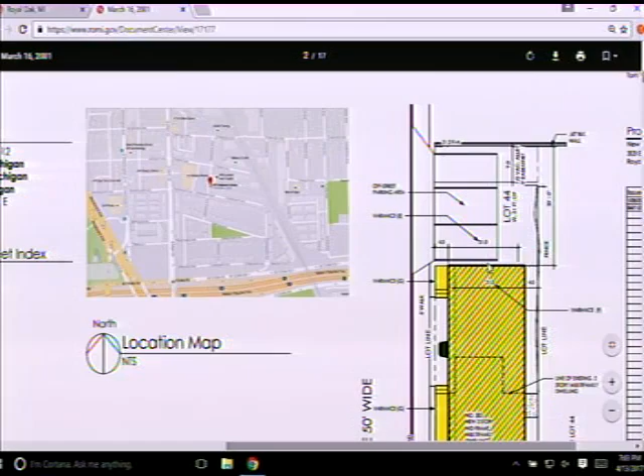illustrates 3 parking spaces to the north of the building. However, the most adjacent parking space shouldn't actually be illustrated there due to the fact that if you refer to the floor plan, there is a lower level apartment unit that has a required egress window well. And that window well projects out to the north into what's depicted as that parking space. So we can't obviously count that since it will be eliminated.

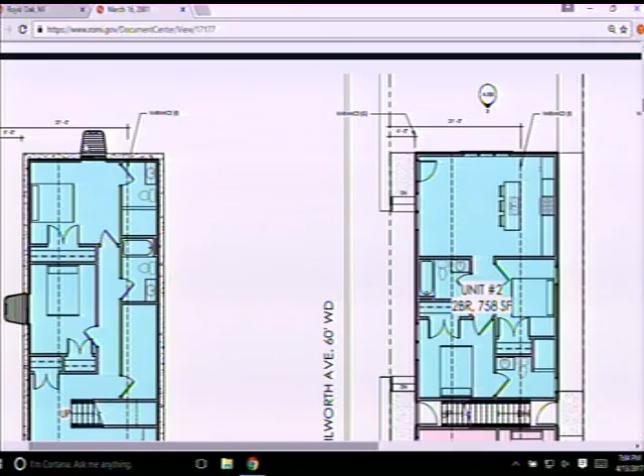So they're left with 2 off-street parking spaces, and again, they're required to have 14. So that's a reduction, but it's still 12 short of the required 14.

The lot size only allows for a certain number of square footage based on the lot size and the number of units. They've reduced the number of units, and therefore it reduces the required minimum lot size, but it certainly still requires a variance. There's no change in the setback variances that are being requested, and it does eliminate the need for variances associated with the size of each of the dwelling units.

So the ordinance does have a minimum size for a studio, a 1-bedroom, and a 2-bedroom. And the footprint of the building stays the same. But by decreasing the number of units, it made those remaining units larger than the minimums. So they're no longer seeking a waiver from the minimum size for each of those type of units, the 1-bedroom and the 2-bedroom. So those variance requests are eliminated.

That's a brief summary. If you have any specific questions, we can delve in a little bit further. Are there any questions for staff at this point? Not seeing any. Are the petitioners present?

It's Tom Violante, 2758 Amberley Lane, Troy, Michigan.

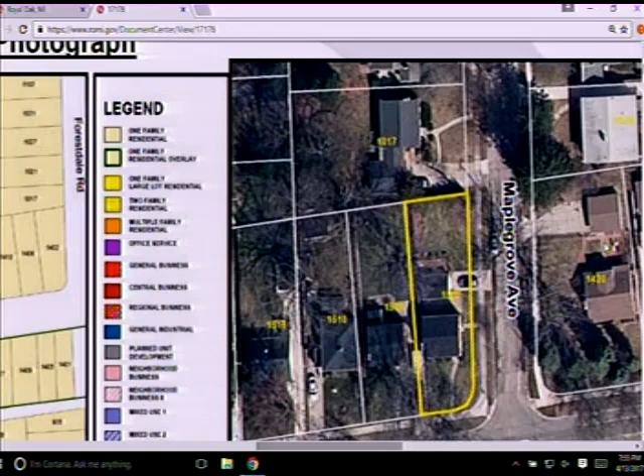This lot is located at the corner of Catalpa and Maple Grove. There's an existing detached garage accessed from Maple Grove, as you can see on the aerial photograph in front of you. The petitioner is proposing to demolish that and construct a new detached garage, which I'll illustrate on the survey sketches.

This side-by-side comparison illustrates the location of the current garage, proposed to be demolished and relocated a little further to the north. The existing garage and the proposed garage are located within the front setback of the house to the north, which fronts along Maple Grove. Zoning ordinance requires that any structure, whether it's the house or the detached garage, be set back equal to or greater than the house to the north. So the proposed garage would have a 24-foot setback from the property line, while the house to the north has a 39-foot front yard setback. They're seeking a waiver from that front setback requirement in order to construct the new garage.

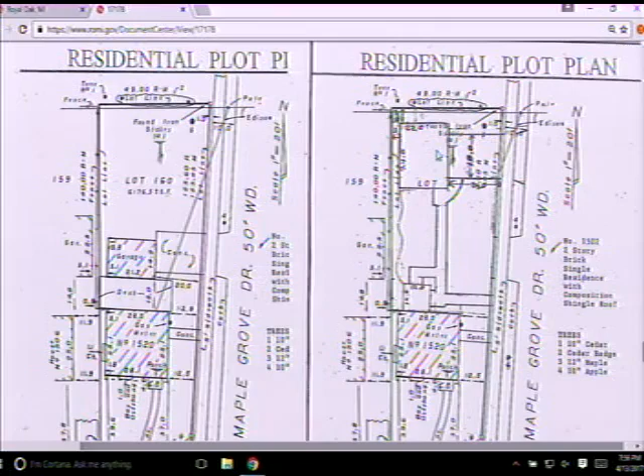Any questions for Mr. Murphy at this point? So, just to be clear, if we apply this 39-foot front yard setback, this building envelope will be about 8 to 10 feet wide. Is that about it? It limits it severely. That sounds about right. And it's basically just to line up with the house to the north of it. Correct. And the current garage is already encroaching on that 39 feet, correct? Correct, and it has a 20-foot setback.

Any other questions? Are the petitioners present? Please come forward.

Hi, good evening, I'm Luke Sandzik. We want to build a garage. We just moved back into Royal Oak, we've lived in Ferndale for the last 20 years, we both grew up in Royal Oak and are happy to be back. The house we bought is in a beautiful neighborhood, the garage not so beautiful. It's got holes in the back, you can crawl under our deck. We want to demolish both and put up a nice garage further into our lot.

After looking at city code, I realized we couldn't do it, so we reached out to Joe and asked what we could do. He said we had to come in front of you guys, get a survey, and talk to our neighbors, which we've done. We've got one letter of support back from our next-door neighbor, and talked with the other two neighbors directly affected by this project, and they are in support of it, they just didn't get the letters back to us. What we gain from this structure is a yard we can use and a driveway I can actually park my truck in. Right now I cannot pull my pickup truck in the driveway without parking on top of the sidewalk, so we fight over the driveway. Who wins? I think we know the answer to that. So that's what we're looking for, if you have any other questions for us.

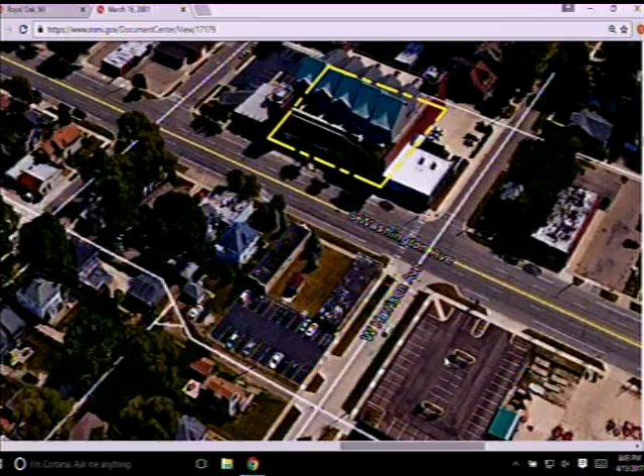So the structure originally was built and never occupied. It currently contains 5 incomplete residential units on the upper floors, and a second floor was originally approved for office space, and it's always remained vacant. The ground floor has a small tenant space, and

the majority of it is off-street parking. It originally required the parking lot, the surface parking lot on the opposite side of Washington. The petitioner is proposing to complete those 5 residential units that exist on the upper floors and convert the second floor to 12 residential units and occupy that ground floor tenant space with a commercial use.

All of those existing uses require a certain amount of parking. The parking that's on the ground floor of the building itself is in excess of what's being proposed. So the lot across the street is not necessary, it's not required to fulfill the parking needs of this proposal. However, the proposal would result in 17 residential dwelling units, and this particular zoning district allows for a maximum of 12 residential dwelling units based on the zoning ordinance standards.

So they're seeking a waiver of 5 from the maximum allowable 12 units in order to complete the second floor to additional residential. If you have any questions?

Any questions for staff at this point? So the first floor, which has parking, is there parking in that, like a garage drive-in, right?

Correct, we can look at the floor plan, and I'll also show some photographs, but you can pull in under the building, and the parking is under the building itself. There's a small commercial tenant space that fronts along Washington Avenue. It's not very large, and the remainder of the ground floor is parking.

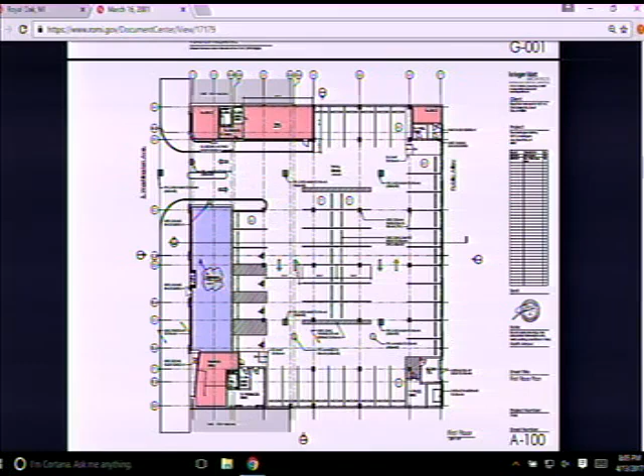Thank you. And so then the parking necessary for any commercial interest is also included underneath that? Yes, it's in total. It requires, I think, probably somewhere in the neighborhood, but I don't know how big that little front commercial space is. It's hard to tell, it's just kind of flat. It is approximately 1,600 square feet.

So it requires a certain amount of parking, but its required amount of parking and the 2 spaces per residential unit can all be accommodated underneath the building, and there still be an excess of parking for the ordinance standards.

The previous office use was quite large, and it required far more parking, so it was necessary to build a parking lot across the street. Now the parking lot's been in use, but the building hasn't. That's the best way to describe it - the parking lot has been used, but the building has not.

Thank you. Joseph, if you could just maybe explain the reason for mixed use 2 allowing 12 residential dwelling units. Is that a calculation of lot size, building size, anything, or is it just a flat out number?

There is a calculation associated with it, just like any site that's zoned multiple family, which would not allow other uses, but it only allows multiple family. This mixed use allows multiple family and a variety of other uses like retail, office, restaurant.

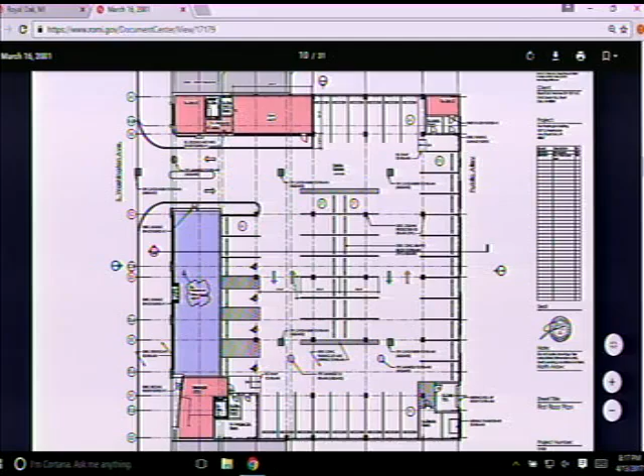There's a stairwell and an elevator on both the northwest and southwest corners. The northwest goes directly up to the roof, correct, Joe? Correct, yep, and it will only service the roof. Then, as you can see, there's parking all around with commercial along Washington.

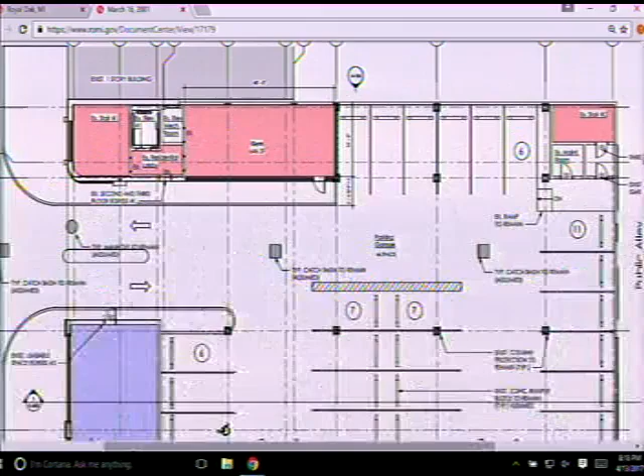Can we go to the 2nd floor, Joe? This right here shows you the proposed unit layouts. The pink represents circulation space, and the blue and yellow represent the units. As mentioned, we are proposing to cut in balconies on the east side.

We did the calculations for what's allowed to be open per the building code. That was reviewed by the building department, and what we're proposing meets that—they made us check that before we came for the variance. So what that allows us to do is provide balconies and light to units on the east, and the west already has amazing balconies that we will be using.

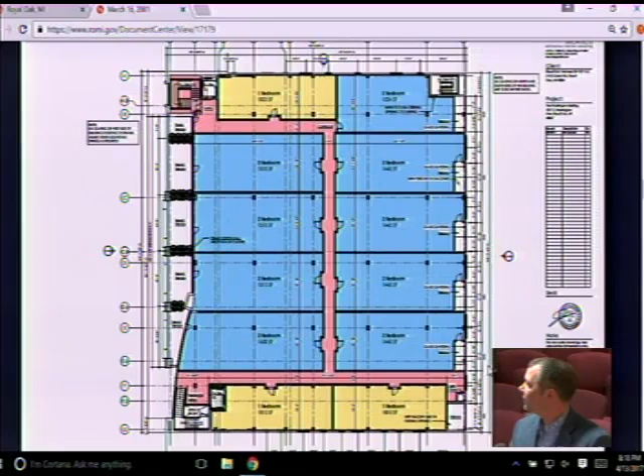Go to the next slide, please. Those are just the existing 5 units up on the roof—we're not doing any work there besides the improvements Joe's been doing on the inside. Next slide. These are just existing elevations that we included as a house cleaning thing, just to keep it in the packet.

Next item, please. Oh, you don't have the renderings in that? Well, the renderings are in the handouts that I gave you. So what we showed you were some—here we go. Yep, next one down.

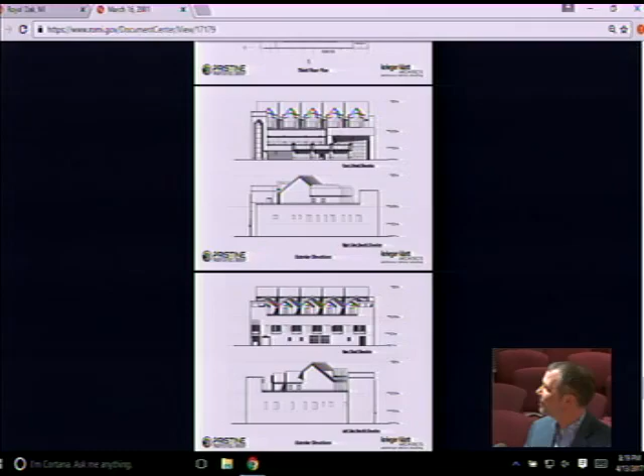So these are renderings that our firm did for Joe, and I'm sure that you're using them as marketing, but this is what the look will be on the inside. You'll see that they're nice, spacious units. We have the balconies to let light in, and it's an open loft type style. They're finished out very nice, and we think that they'll command hopefully top dollar. These are just the renderings that you can see.

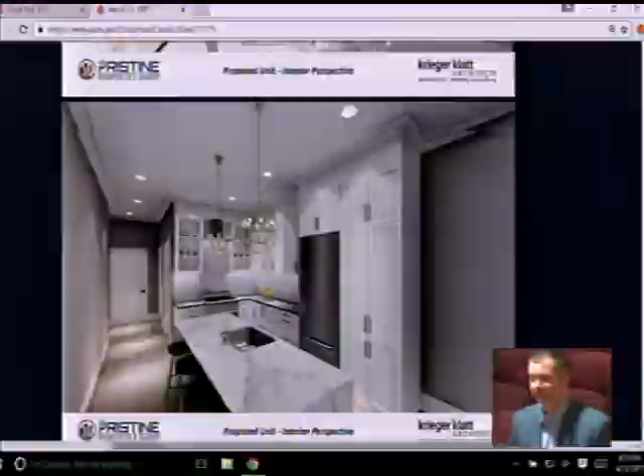That's it. Any questions for the petitioner at this point? Yes ma'am, what's the square footage of the 5 units on top? The 5 units are 2,400 square foot each. They're each 3 bedrooms with 3 full baths, and they also have a study.

I'm just asking because Mr. Collins said 2,400 square feet is too big. Well, and I want to clarify, those were existing though, and built several years ago. We assumed this building, and the problem is that second floor being 20,000 square foot and as office space. It was never designed to be residential. The symmetry of each unit within that floor would be different.

Now those units on the roof, in my opinion, are probably the nicest units in Royal Oak because they're unique. They're rooftop, they have yards, they have an outdoor patio. There's 5 of them, and that type of unit can demand a little more square footage, and we're getting action on them. But a loft-style unit, like we're proposing on the second floor, that only has a window on one side of the unit, becomes a long corridor, it would become difficult to allow light into that unit. You're limited by having windows on only one side.

So if we made it 2,400 square feet, you'd end up with either just this massive wide open space that you couldn't furnish, or you'd have many, many rooms that would not have any kind of light. So what we did was we maximized it for the use of that space there that works to end up with the beautiful renderings that Krieger Klatt has done for us. Thank you. Any other questions?

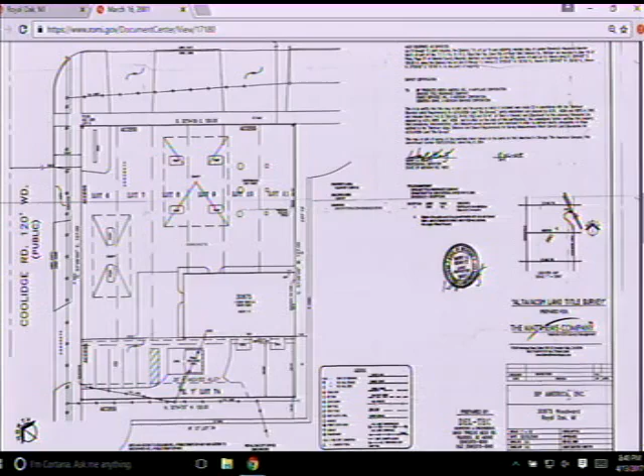It should be noted that there is a mezzanine included with the approved building. If the mezzanine were eliminated from the proposal, it would affect the parking variance—it would be a reduction in the variance request, but it would still need a variance. They would need 13 parking spaces as opposed to 18.

Any questions for staff? Not seeing any. Are the petitioners present? Please come forward.

Good evening, ladies and gentlemen. Matthew Peters, Jeffrey Scott Architects. Very excited to be here today. I'll begin by stating that at planning approval we were granted a very hearty grant on this project. They were very excited about it and what we're doing for the site.

Our client, the owner, has already looked at closing off 2 of the curb cuts as well, to make the site a lot more safe. He's reduced the amount of pumps as well, to make the site more organized, again, more safe. We're looking at a lot of positives here for this project in all manners.

A lot of what you see when it comes to the parking is the fact that your ordinance is written in such a manner that it is based on usable square footage. For this particular convenience store, as many are, a lot of that usable square footage is quite a reduction in the amount of square footage the building has. Most customers will come, park, and be there for a short period of time. A lot of customers may be at the pumps as well, quickly jump in, quickly jump out. So we're not looking at a lot of time being spent in the convenience store or the gas station, and there's going to be a lot of turnover in the parking spaces and at the pumps.

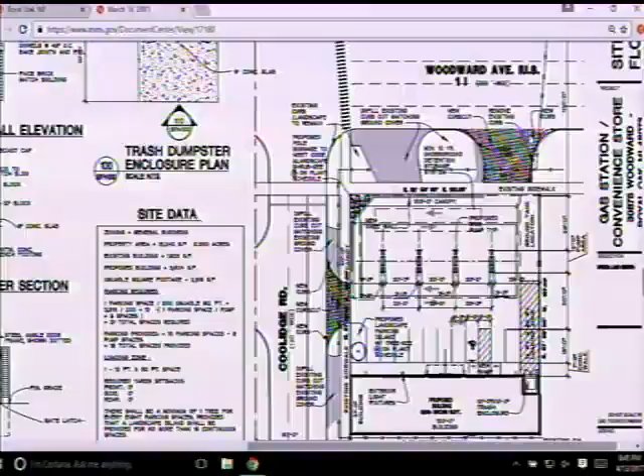Can be kind of a crazy corner there with Woodward and Coolidge, correct? Well, it is a bit crazy right now having 4 curb cuts. So it does make it a lot safer having only the 2. One of them is at the farthest possible distance, on Woodward, which gives traffic the best opportunity to approach it. The other is located center of the maneuvering lane, the one on Coolidge. So it really does create the best possible opportunity for traffic safety and pedestrian safety.

For confirmation, you don't have an operator for the food side of the business? I believe the owner does have a prospective tenant right now. Do you have somebody for that? Nothing concrete yet, but it's only in negotiations.

So the thought is that it is carry-out only, you wouldn't have any dining and seating? No seating at all, no. Okay, thank you.

Any other questions? Now, did the planning commission go into it, and you have alluded to it, in terms of what you expect the typical length of stay for a visitor to be? Is there any research in that line of work? Do you have an idea of maybe average time for customers to be at your store?

Hello, my name is Laith Kassab. I'm the owner. We're building on the other side of Woodward between 13 and 14, that big building that's going up. We're putting that gas station together too. I'm sorry, what was your question?